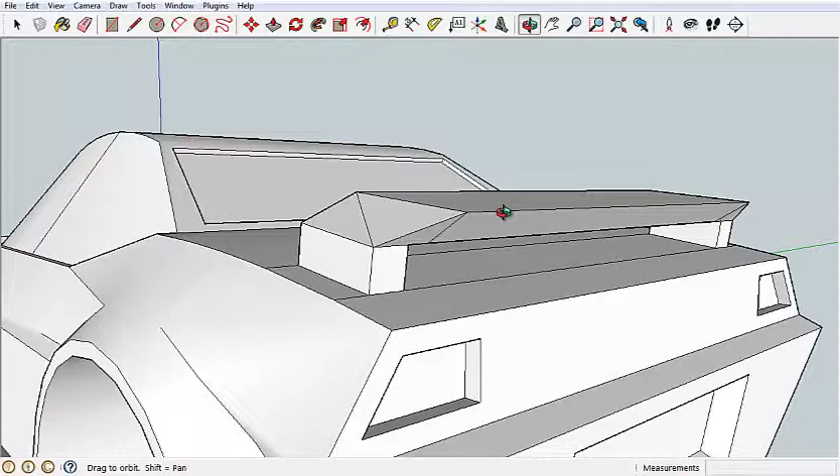Alright, so we'll say I've cleaned this up and I like the way it looks. To get it off of the car and ready to print as a separate file in a separate color, basically you're just going to erase everything except the spoiler. So I can start by just grabbing this whole front part of my car and selecting it and just press delete, and I can get a little bit more from the back here

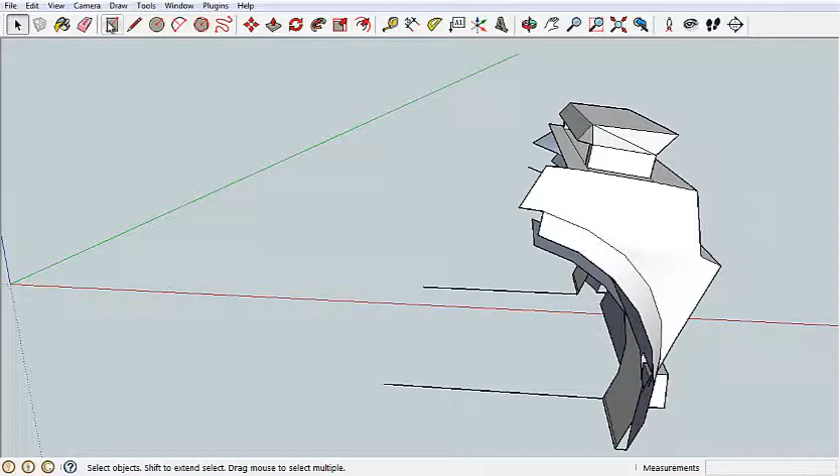and delete. You could use the eraser tool to just continually draw over stuff, but I like the select box a little bit more. It's a little bit faster. So I can grab all of this and delete until all we have left is just the spoiler. So we can take these guys off.

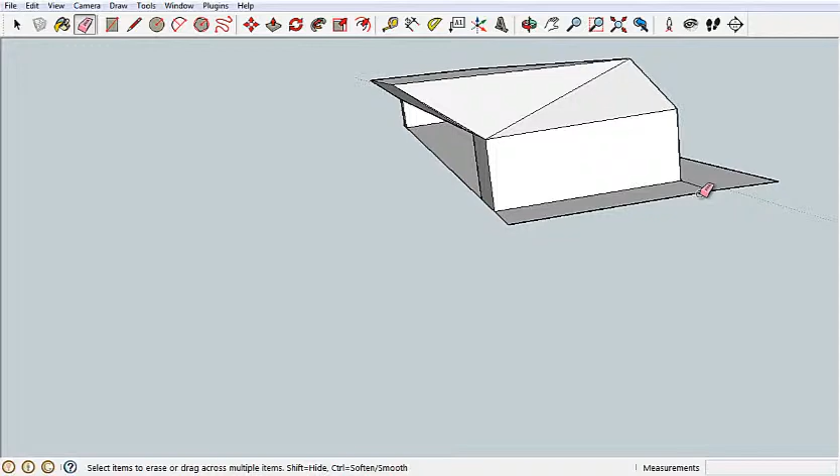Now we need to get our spoiler flat on the red-green plane so that when we send it to the printer it can print nice and flat. And we're actually going to flip it upside down so that the printer starts on this top flat piece and then it can build up to these two side pieces.

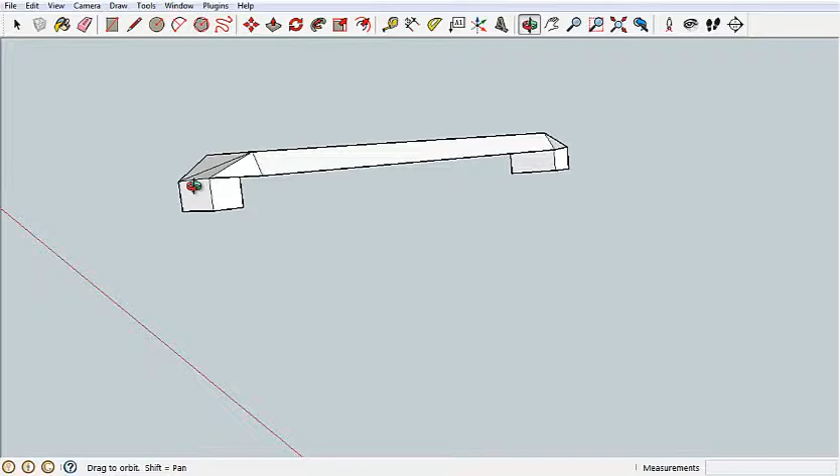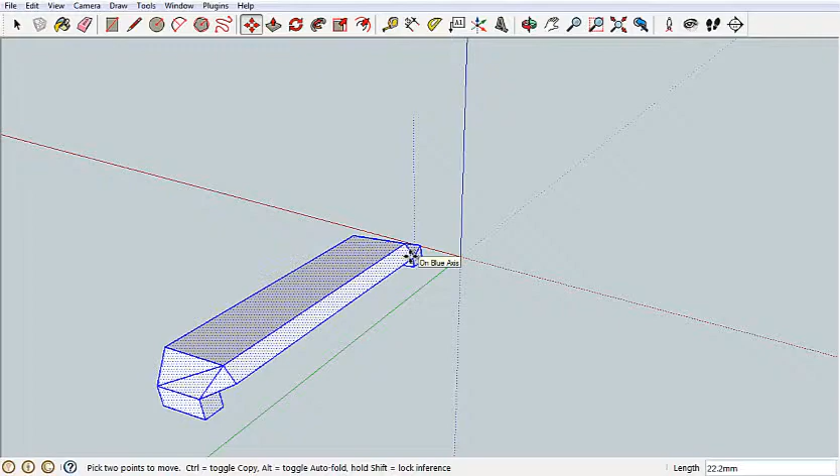So I'll use the move tool. Let's zoom out so I can see the origin, and I'll select the entire spoiler and move it down towards the origin. And you usually have to do this in a couple of steps. So now I'll try moving down the blue axis, and it says on blue axis, so that's good. And then I'll try pulling it over on the green axis, and we're getting pretty close.

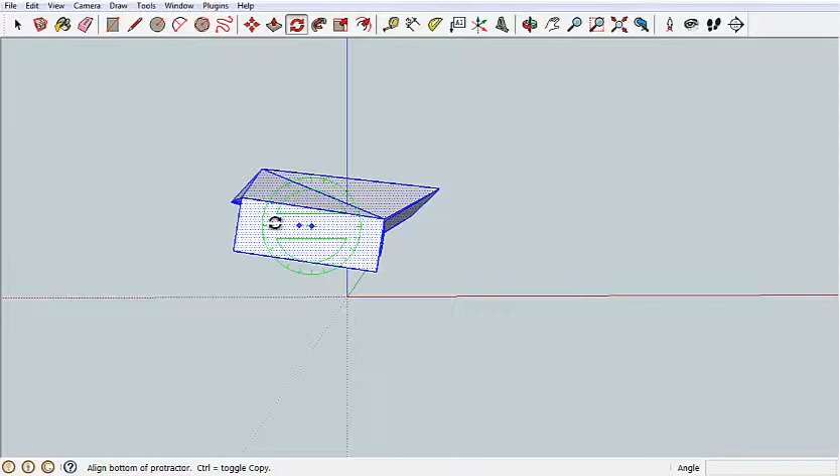Now to use the rotate tool, you're going to need to make sure you're clicking on a face that is perpendicular to the axis you want to rotate around. So if I click once and then click again, you can see I can now rotate my spoiler all the way around. If I had clicked on, say, this side face up here, you'll see it's going to rotate my spoiler kind of around that plane. So that's why it's really important that you grab a plane that is perpendicular.

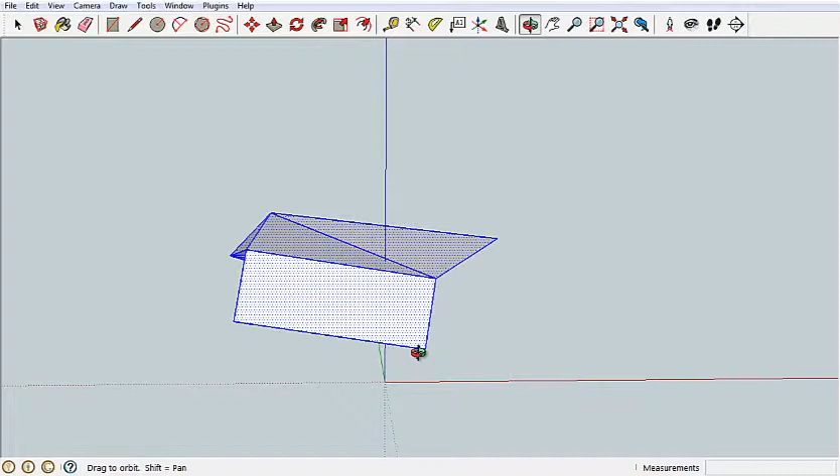We'll begin by just trying to estimate this and try to get it close to parallel with the red axis. So that looks pretty close. And then we're going to use the protractor tool to make sure we're exact. Before we do that, I'm going to actually move the spoiler onto the origin of our axes. That's going to help us be a little bit more accurate.

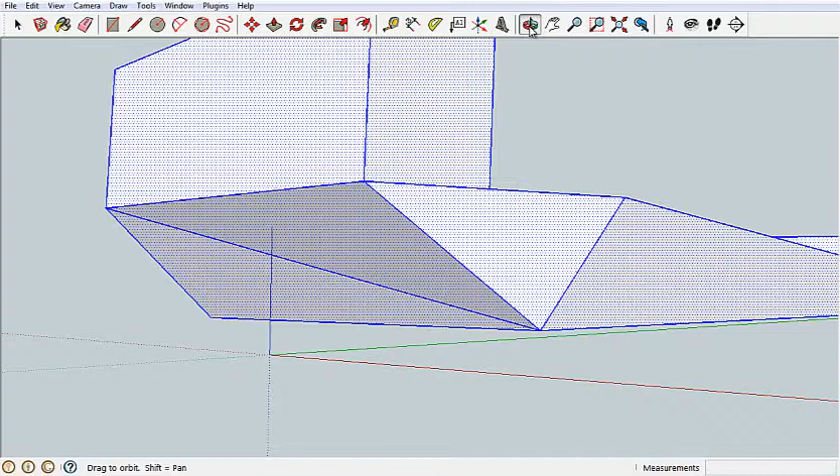So we'll use the move tool and make sure I'm grabbing one of the corners that's going to be on the surface. So I'll grab this one, and I'm going to try to move it to snap onto the origin. So if I grab it here, you see I can't quite get there. So I'll get there, and then I should be able to try again and get it to snap on the origin.

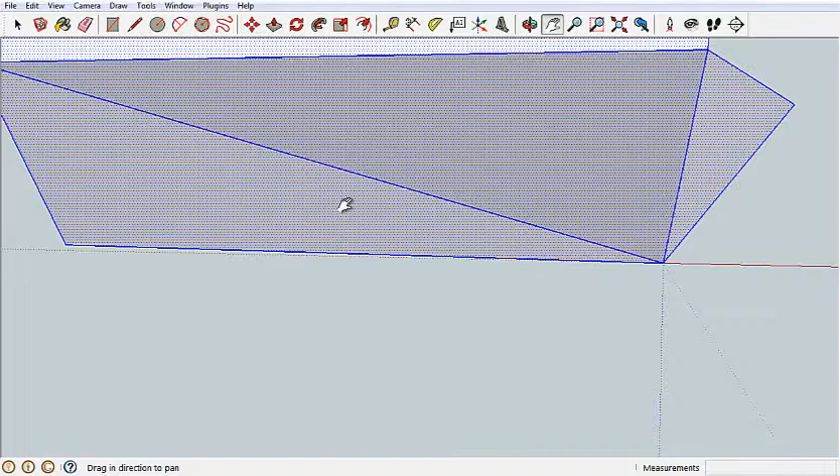Now we can see how close we were to lining up on the red axis, and you can see obviously over here we're on it because I just snapped to the origin, but over here on this side you can see we're not exactly on the red axis. We are a little bit above it. So to fix that, we need to use the protractor tool, and we can find out exactly how far we're off by drawing a line that is on the red axis.

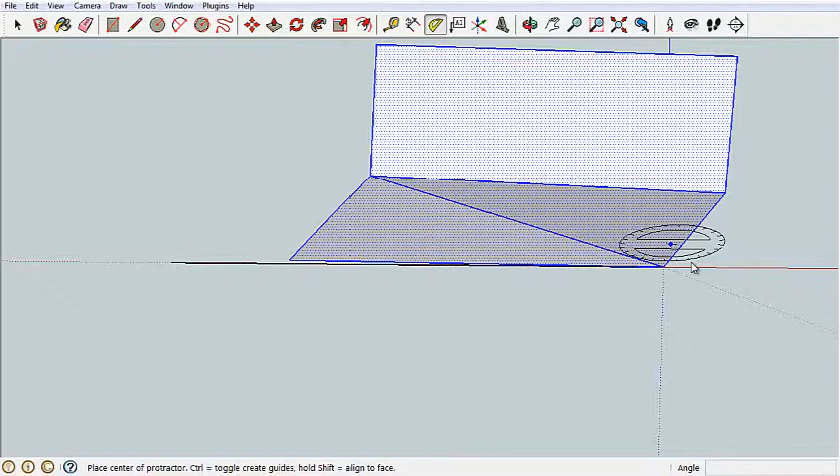And the protractor tool works by clicking where you want to start, which would be the origin, and then clicking out on the line that you want to start your protractor on. So this would be 0 degrees now. And then I want to see how far off I am down to this other line. So as I move down, it says I'm 0.6 degrees away from this red axis.

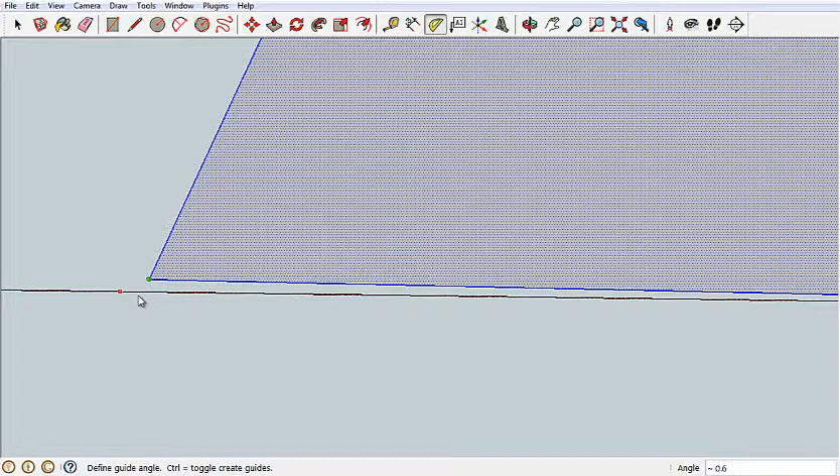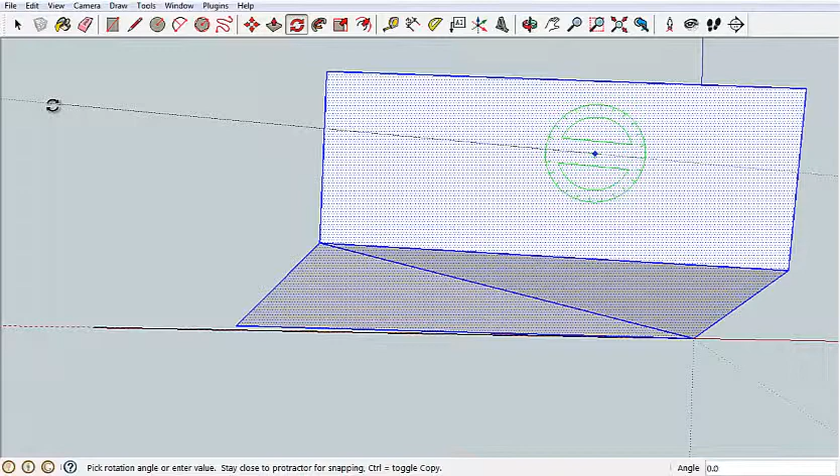And that's important because now if I use the rotate tool one more time on this side, I know I need to just lower my spoiler 0.6 degrees, and then it should be in line with the red axis. So we'll use the rotate tool, we'll grab the side, and I want to go down just 0.6. If it doesn't let you do something that precise, you may just want to zoom in a little bit, and that should let you be a little bit more accurate. So if I go to 0.6 right there, we can see that now it's coming right to this line.

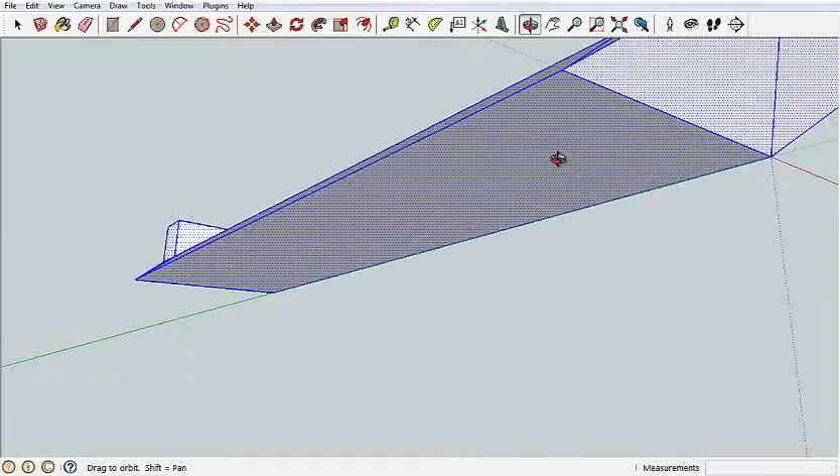So now we have a spoiler that's going to print well because it's going to print upside down, and this entire face is going to print first. That'll be our base, and then as the printer adds layers, it's just going to build up, and it should finish with the tops of these two pieces, and that should do it.

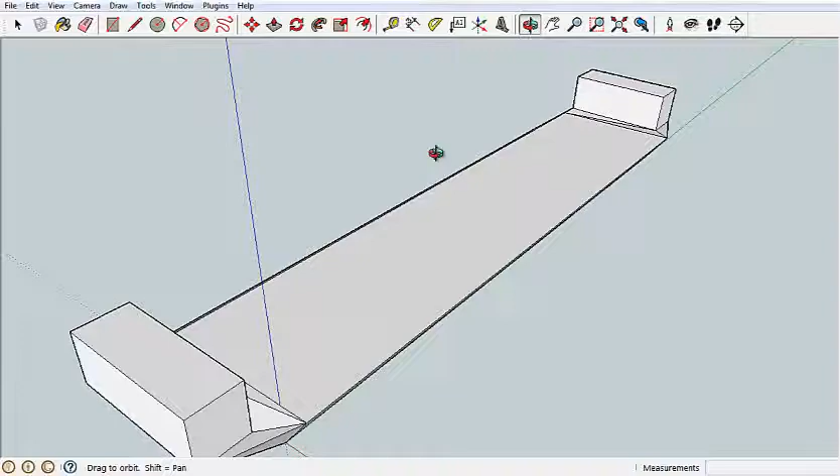We can now print this spoiler in a different color than our main car, and we know it's going to fit exactly on the car because we drafted it right off of the car itself. Alright, so try that, and we should be able to get some really cool cars with multiple colors, and that can look really nice.